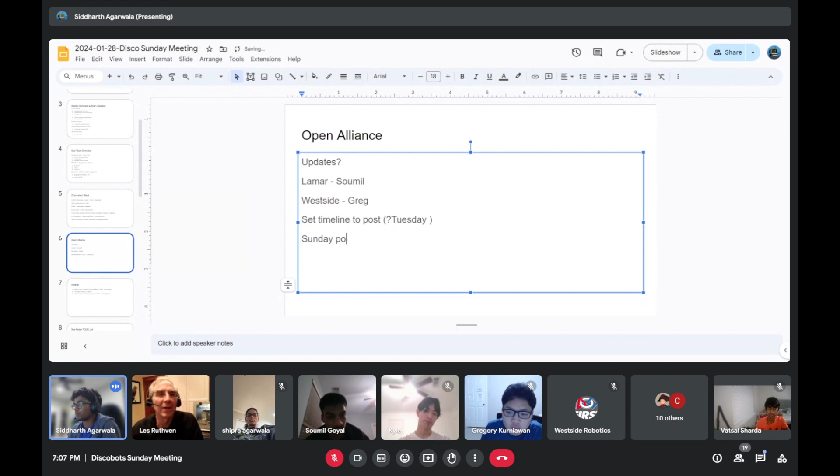Awards - these deadlines are coming up, so please fill out the Dean's List form, and my mom can tell you more about the other award stuff.

Currently I'm working on the Impact Award essays. I have asked students to share their Woody Flowers moments - what we'll do is get together with a group of students and go over last year's essay for Carl. But if anybody has any moments from this year, drop a DM or post in the Crescendo Awards channel, and we'll add that to the essay and clean it up for this year before we submit.

And then I have to talk to Andy about the Dean's List. I think that's all for me.

Yeah, Andy, are you able to present? Okay, you want me to do it? Oh no, like it just- he's here now. So that's, yeah, he's at the airport right now. Yeah, I guess he'll just listen in.

I guess here's the non-robot to-do tasks. If you are interested in being involved in any of these, please reach out to Andy or one of us and ask about procurement, or like I know the website team has been doing stuff. Do you guys have anything you have to share?

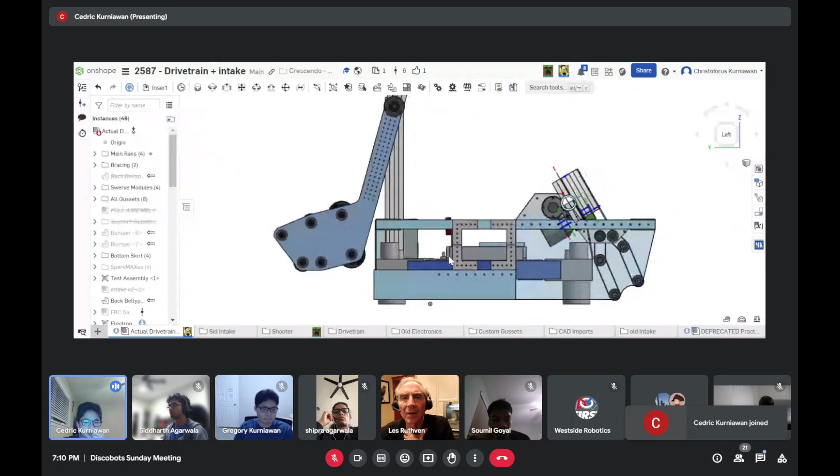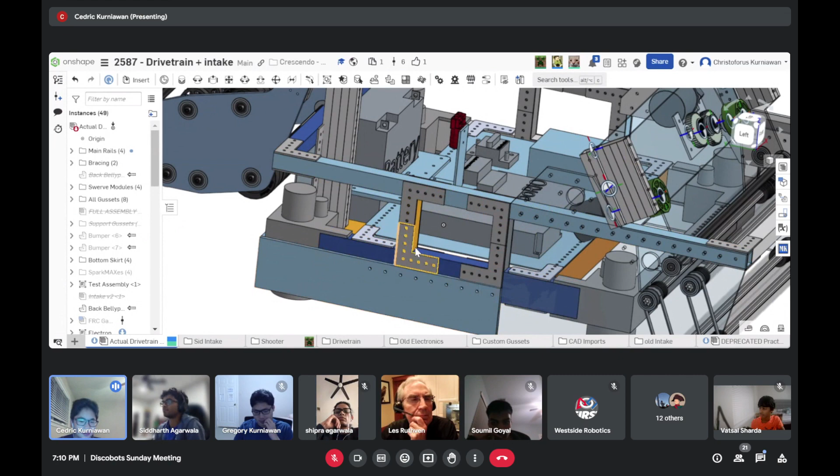So like Sid said, we started making a test fit of our drivetrain this Saturday. Yesterday we got all the rails, the skirt, and the drive rails cut. We just need to integrate swerve modules. We even got the bracing cut, which is nice. We put gussets on there, these L gussets that we're pretty sure we're gonna rivet on, because right now we have 3-inch screws on all the gussets, and that isn't ideal. But all the dimensions are finalized.

Update, we have this electronics panel that we finally sort of finalized. This block is gonna be the network switch and the Raspberry Pi. So yeah, I think that was about it that happened with drivetrain, but we finalized it, so that's nice.

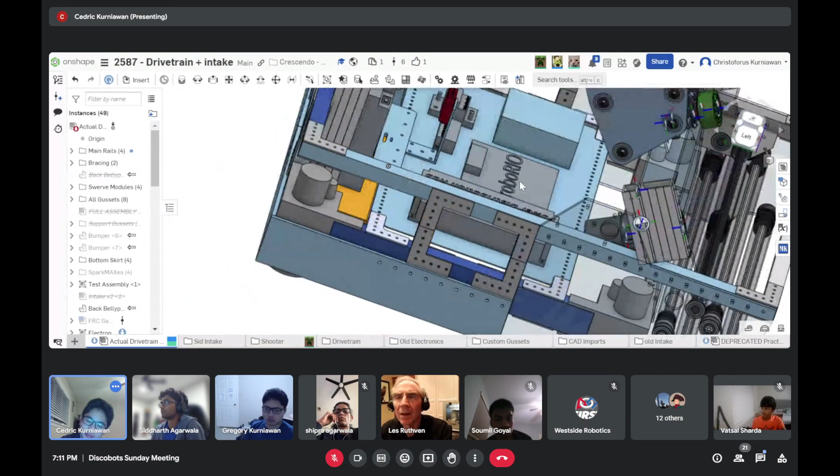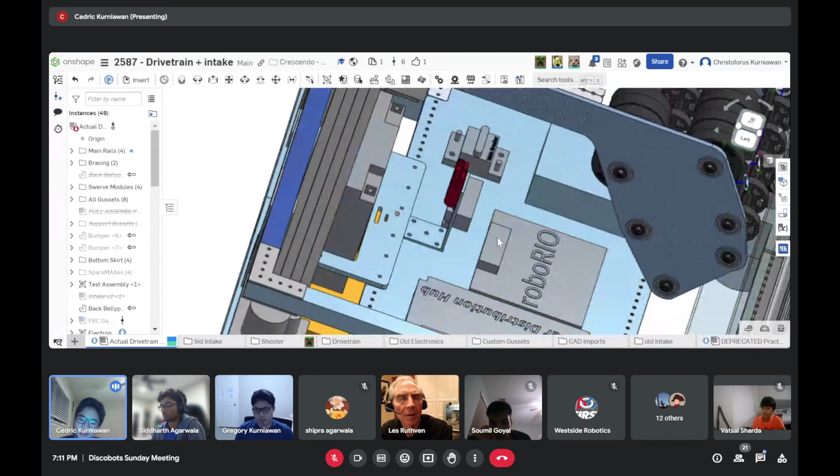Still, one of the things that hasn't been fully decided upon is bumper mounting. We've had ideas for latches - Karl and I looked at a bunch of different robots from Disco's past seasons, so we have a good idea of what we want to do, but it's more trying to actually make it work with what we have. That's the challenging part, but this is our drivetrain for the year.

Let's show the picture from what we have. Let me open Slack. We can present it.

Okay, so we made a mock-up of our drivetrain. Everything's attached using 3-inch screws right now. When we build the real thing, it's gonna be riveted together. But this is just a mock-up to see all the dimensions, that we are 100% set on it, right?

Right now it's made out of max tube. Some of the max tube I think we're gonna change out - for example, that max spline on the side, I don't think it's gonna be max spline. But I think the upper skirt might still be 1/8 the Rev max tube for the 1x1s. So that's what we've got for right now. I think the only thing we're missing for being cut is the two 3.5-inch pieces at the back, but those should be pretty quick to make.

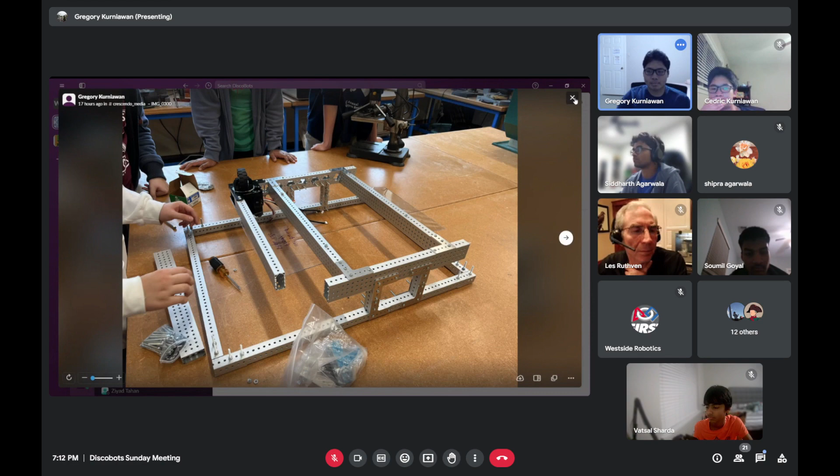I saw in the CAD you had a plate with 2 Spark Maxes each. Are those supposed to attach vertically between the upper brace and the drivetrain? Is that the plan? I think it depends - I think we're doing vertical mounting for the rear, for the swerve modules in the back, and then mounting it... actually no, it's the other way. So yeah, the ones at the back, the plate is vertical, right? So the Spark Maxes are stacked.

Can you open the center? The back ones were mounted before - we took it off just because, the back ones we're strapping the Spark Maxes onto the upper skirt, but the front ones were attaching them straight to the belly pan. That's just because the back section of the robot is so cramped right now with all the battery and all the spacing you need to route the wires for a swerve drive to work, and also the arm probably. Even before the arm, it's already a challenge to put it in with all the clearance that you need. That's what we did for that one.

The Spark Max we could move pretty simply, I think, but we may need some space for other stuff on there.

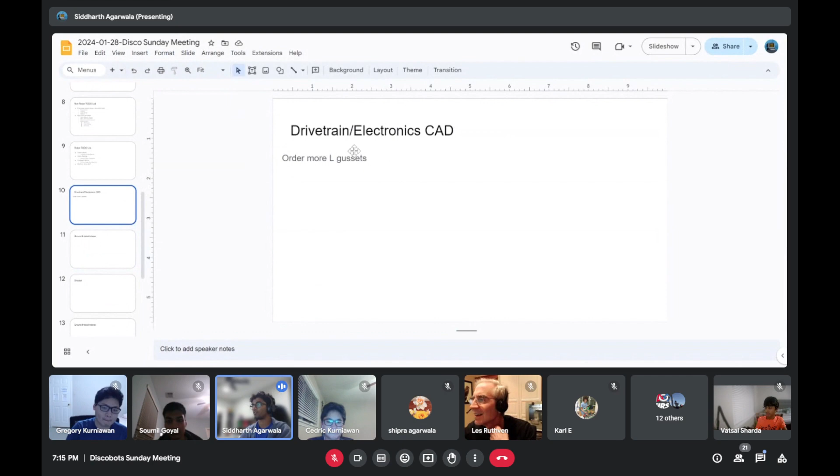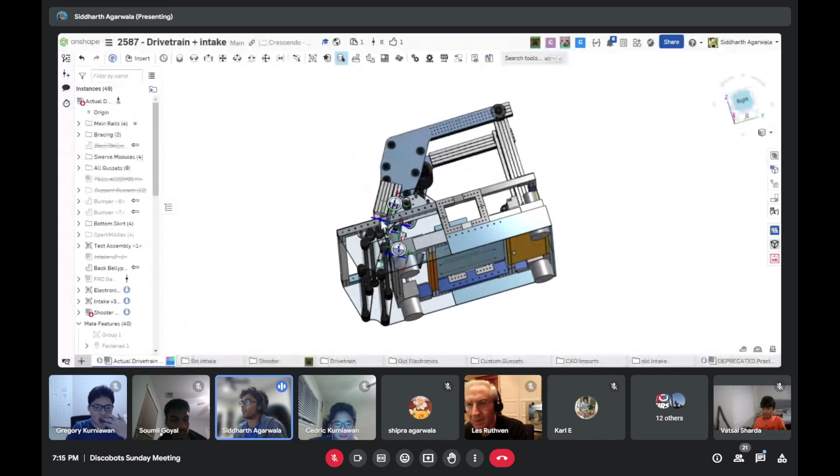Okay, so the next thing we have to talk about is the ground intake/indexer. I think there's two people - I'll go first, and then we'll have the people working on the arm that integrates with this intake go, and then Soumil can share. So right now what we have over here is based on the Spectrum design as well as the Lamar intake. The spacing of these rollers is based on the prototyping that was done at Lamar this week.

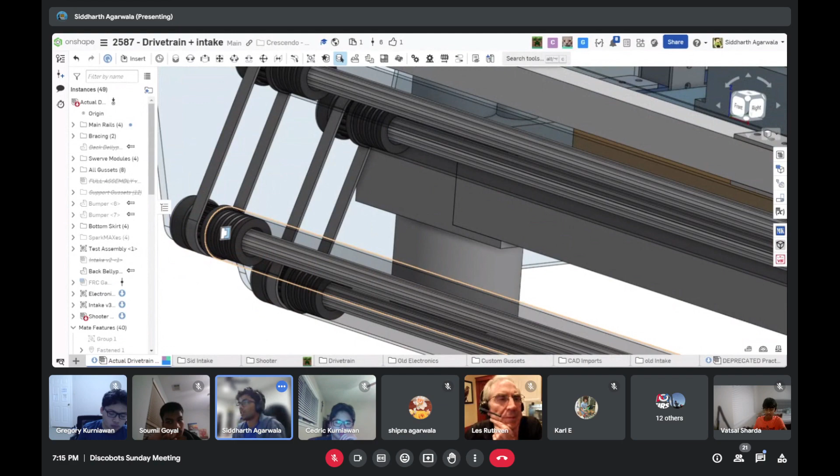However, what we've done is we've taken a lot of inspiration from Spectrum's rollers, where we have these dead axle pulleys. This churro stock in between doesn't move at all. It's bolted into these plates, and then you have 3D printed pulleys with bearings on them, and that goes into the Versa roller and gets hot glued and screwed into place.

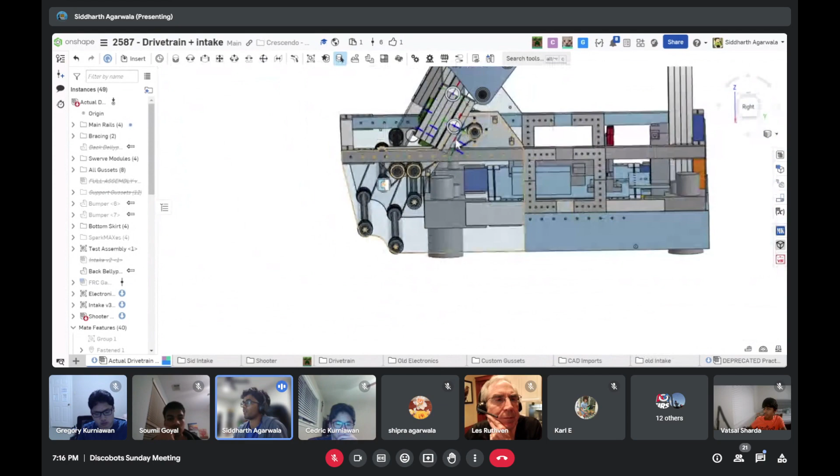We've outlined all of the belts and the gears needed to ensure that this motion happens, and everything's pretty clear all the way back to this Neo.

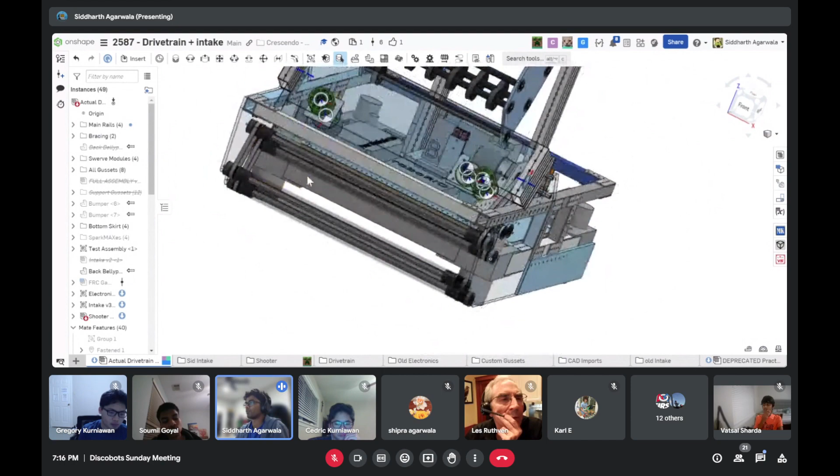The other idea we had was based on the robot CAD in 12 days that we saw on Chief Delphi. What they had done was use compliant flex wheels to center their note once it comes in through their under bumper intake. So we've done a similar concept here with an extra roller down here.

This axle would be a live axle through this gear, and that would just push it into this indexer / centering mechanism, which would then feed it into our arm.

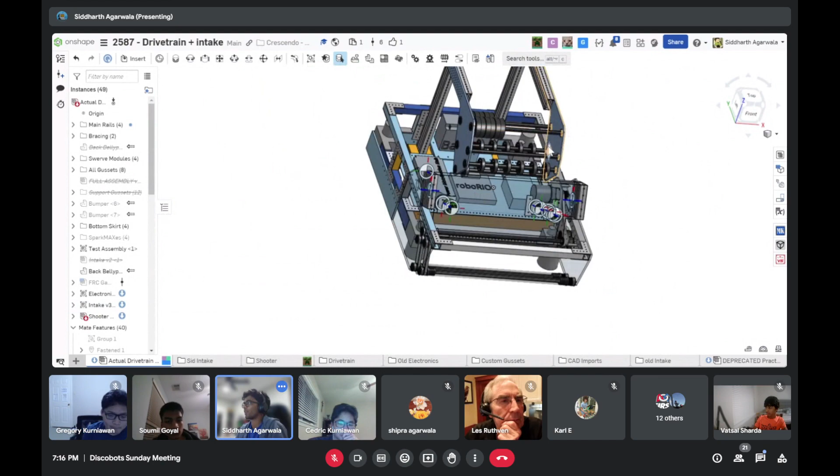The idea for this plate is that we could laser cut it this week at Westside, get it attached to our test chassis, and have the programming people be able to run autonomous paths.

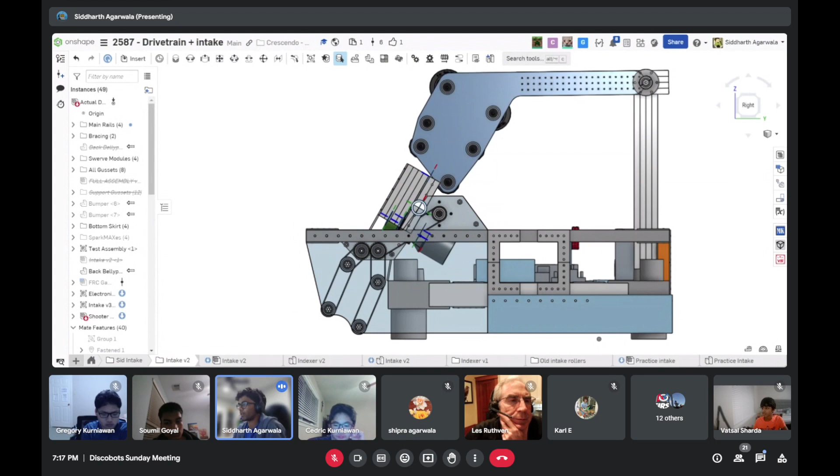If we don't want to do a full-sized intake, we also designed a practice intake, which is a good bit simpler, doesn't have as many belts or features, and it just runs off of bag motors.

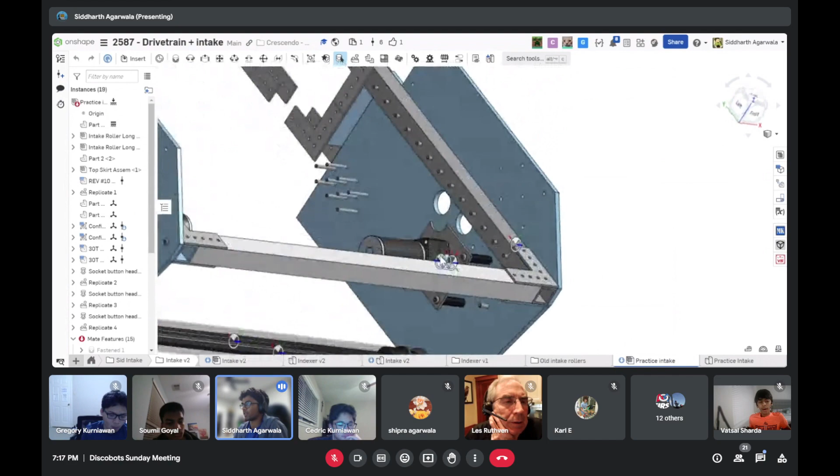Some of the parts will take a sec to show up, but the idea is that this can be attached to the programming robot so that we can test our path generation and following this week before it gets even further into build season.

The next people to share are the shooter and the arm people.

Okay, I'll share my screen.

Can we, while we're doing ground intake, actually look at Soumil's intake, now that it's all fresh? Okay, sure. Should I present first? No, Sam will go ahead. All right.

Okay, I think something should be visible, hopefully. Yes, okay, just one second, let it load.

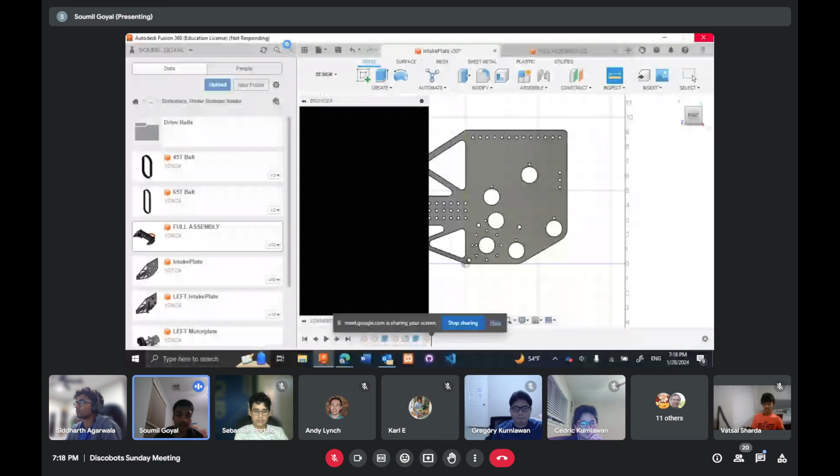I saw what happened before, which is that the initial design of this ground intake did not clear, mainly with the 1x1 at the top, but also some other issues. So we spent the week refining it and tested it some more.

Here are the main updates. First of all, the biggest one is that the motor is at the bottom, so it's the most optimized center of gravity all the way down. It still connects to everything.

You can see these two belts connect to each other on the back, and then these two connect on the front. It's the same dimensions, so same 7.0 inches sticking out, so we don't have to add any more space based on the final drive dimensions.

Additionally, we tested at Lamar with the previous version of this intake plate, the one with the motor at the top, and we saw that notes in some circumstances have a chance to not cross from one stage of the roller to the other because they sag down, even if everything is spinning at the same time.

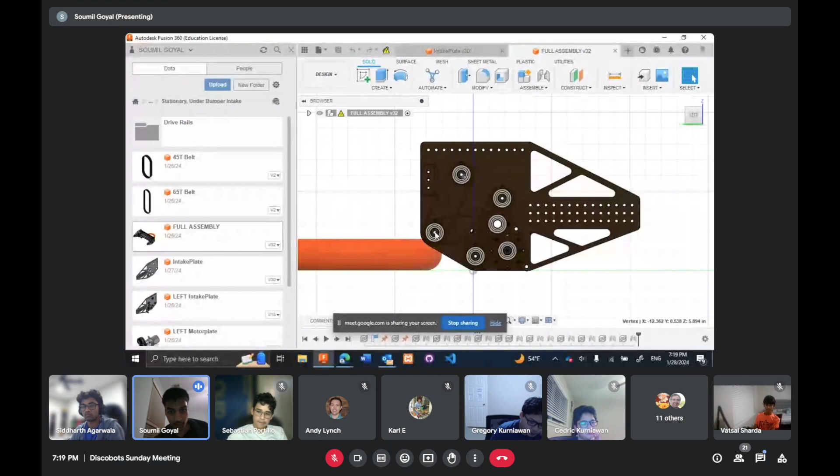So we also reduced the space between this roller and that one so that the notes cannot jam in this way. I think we reduced the gap between the first stage and the second stage by 1 inch.

Lastly, we also made it look a bit cooler and stronger by putting this triangular pattern on the back. So overall, it should be quite similar to the last one, except it won't interfere with any of the things. Oh, also put this 2x1 extrusion inwards to save more space.

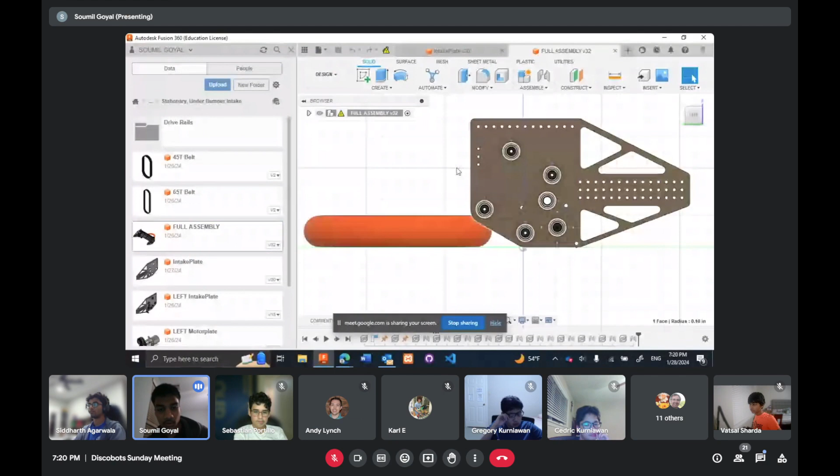And of course, we can mount a bumper over here since I believe the 1x1 skirt was raised by some inches. Now it's 4.5 inches above the drive rails, so it cannot mount the bumper. So this can be a bumper mounting location.

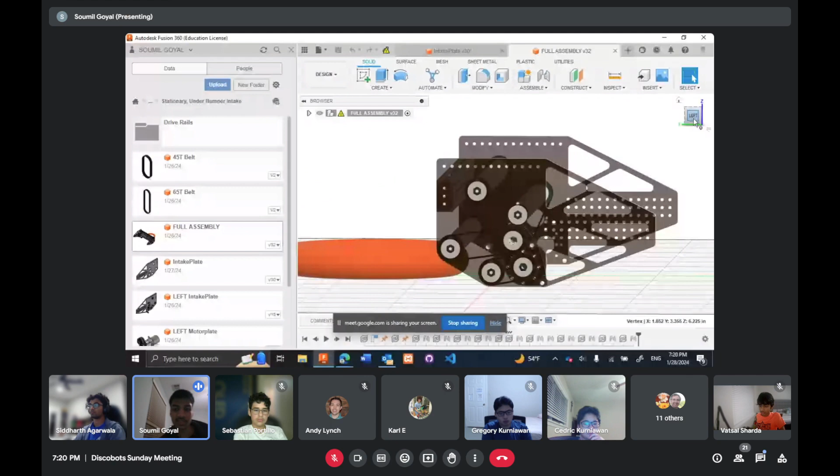So yeah, in the end, I think it could be ready to cut as a final design, since all of the aspects like the compression and the roller spacing have been tested, and it can be continued on into a shooter or indexer. Anyone have any questions about it?

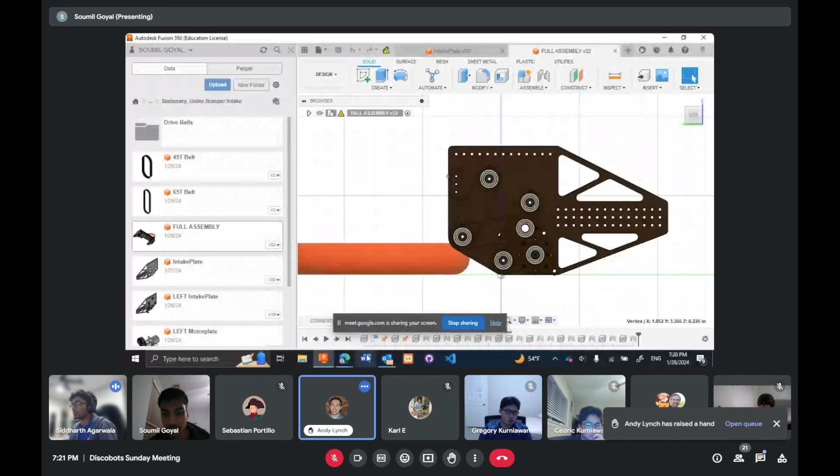I have a question about the two low intake rollers. Are they in the same position between the two designs? Are we all using the exact same geometry? Yes, they're in the same position. What about the higher rollers? I think the two higher rollers might be a little different per design. They are different now, yes, because we shrunk it.

We discussed the issue with notes not getting through the intake on Saturday, and what we were deciding to do was just put pieces of polycarb in between the rollers, just so the note slides up and can't get stuck sideways.

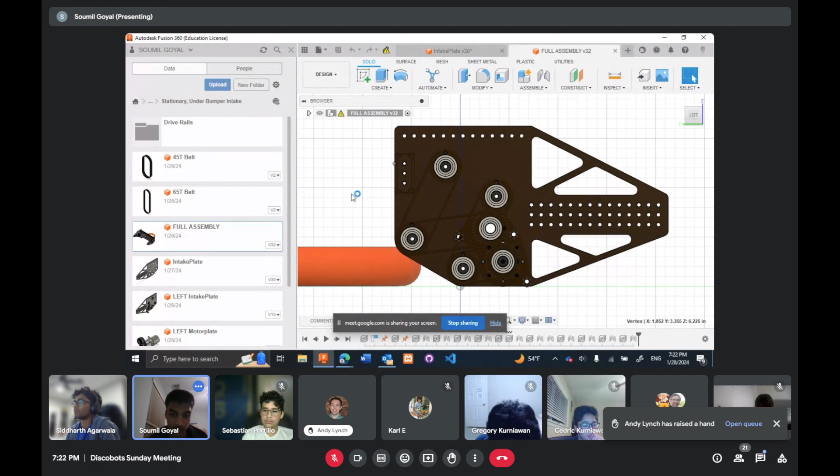Yeah, we tried something like that. We put a piece of wood in the back, but we saw the wood may work if the robot is staying still, but if the robot's moving, the note also creates friction with the floor, so it can mess the path up. Most likely it may not, but we want to plan for every scenario, right? Yeah, so that's what we did.

Also, maybe another thing to note is the motor is not in the path of the note going up, so the motor and this assembly won't block anything. And also, I saw the dead axle thing on the Spectrum CAD as well.

I think it looks good. I would be fine with changing this design to have the churro concept. It looks nice. I think it's nice that there's no bearings and stuff on the outer plate, so you can just take out the screws pretty quickly. Yeah, but if something breaks, then you can repair it more fast. And so no need for shaft collars.

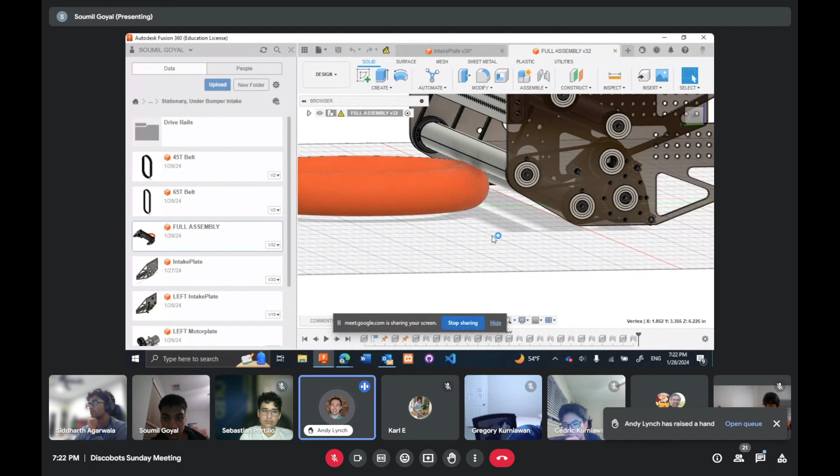The main difference between the two designs is the motors and the pulley arrangements. Yes, that's my understanding.

I think the size might be slightly different too, because I was looking at OnShape this afternoon and it showed 7.5 inches.

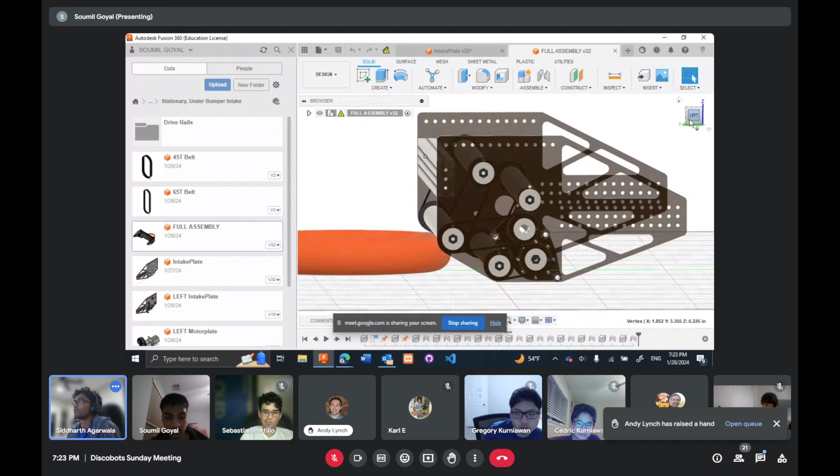It's whatever dimensions we've finalized on the drivetrain CAD. So however it is, it's no problem. It seems like we're so close it doesn't really matter that much, except we need to make a decision and decide what parts we have available to build it.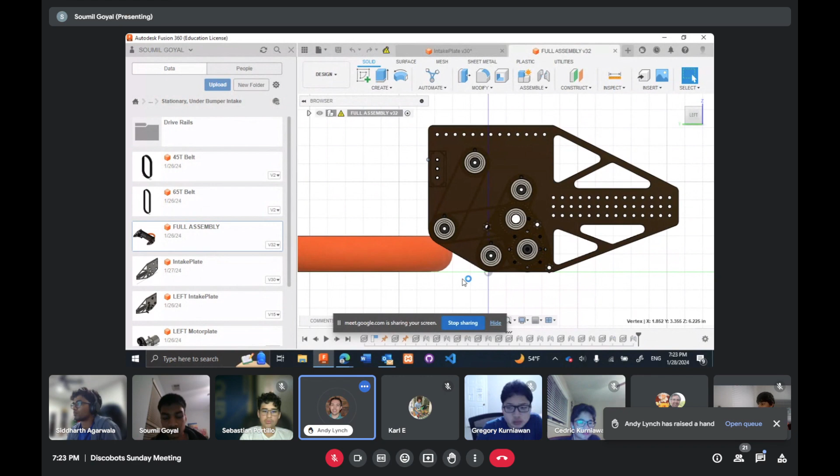Maybe this is something that goes offline that we work out with Lamar, especially as we decide what to print, because right now we don't have a quick way to print this since the laser is a bit broken. So just be mindful, Soumil, that it will be difficult to go ahead and make this directly at Lamar right now.

Without a little bit more work than we're used to with the laser. But I think what we need to do is progress beyond this in the CAD. If we're generally in agreement that the profile of the note will come out about the same way, and we've allocated all the space for these mechanisms in the ground intake, that just needs to be reserved so nothing conflicts between both intake designs, and no other shooter or climber subsystem stuff gets in that space. I'm pretty sure the packaging is actually very similar for both designs.

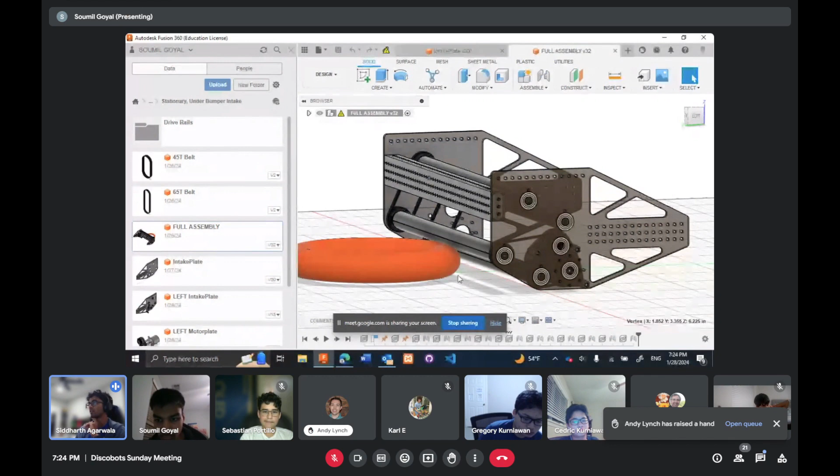Okay, yeah, so I think we're okay there. Then let's table it a little bit and not get in a hurry to print these yet until we've really decided which direction we want to go with the motors. Well, one, Lamar can't print them anyway, but Westside, you guys maybe want to hold off a moment on this, and figure out what our priorities are on the ground intake stuff.

I mean, you could use the one for the practice robot though, if you wanted to. You could actually even print the current CAD plates for the practice robot, just use bag motors or something.

Yeah, I don't know if it makes sense to go with the bag motors for a lot of stuff. If we're going to learn a lot from this, we should just start making this plate and make sure it works, testing the version that's hopefully close to the final one. It depends a lot on what they can do at Westside since they have the laser cutter.

True, yeah, we need to decide on parts to see what we could actually do. Westside's got the laser cutter right now, so there's a lot of important things, but let's revisit the ground intake later.

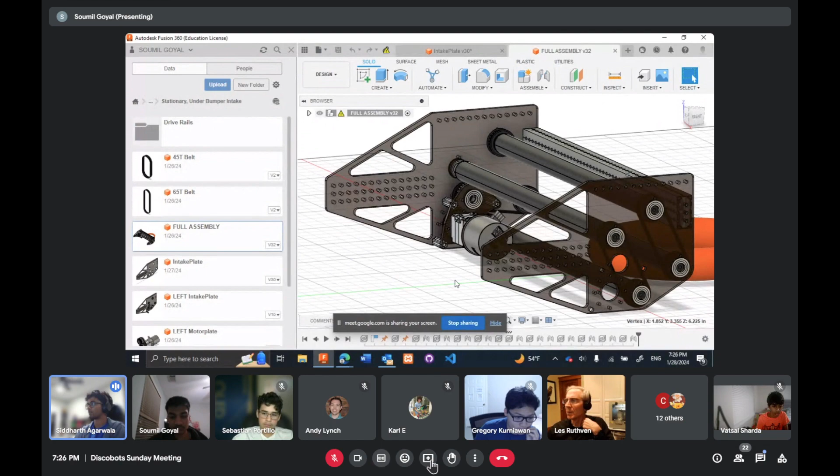I think you guys are in a good space. Maybe let's move on to the other subsystems, make sure we understand how it's all going to fit together. Okay, yeah. So the next people to present, I guess, are Sebastian, Cedric, Vatsal, and Driti.